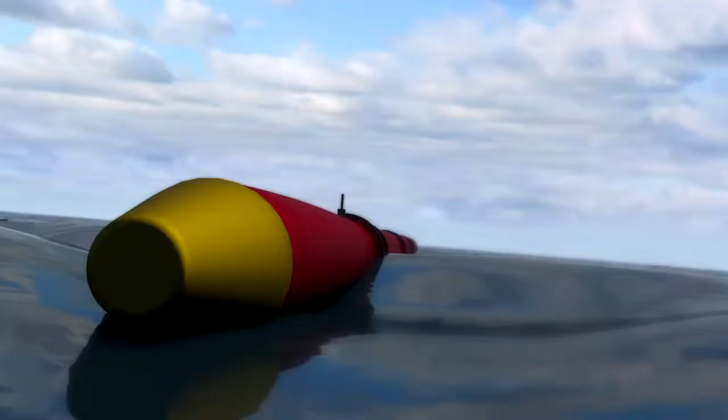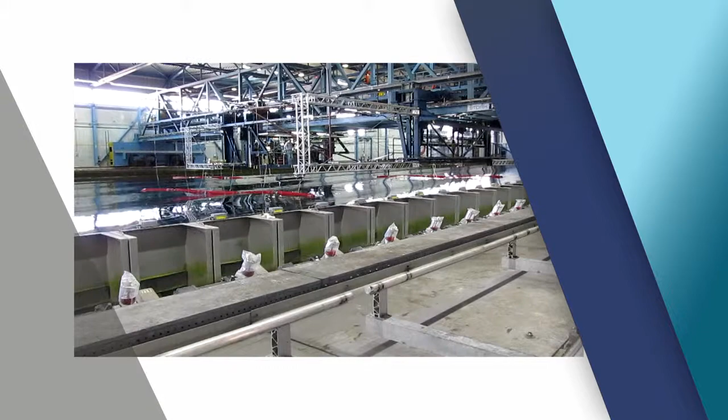The world has a significant wave energy resource, which, if properly exploited, could contribute significantly to global energy requirements. Deployment of wave energy converters, or WECs, in pre-commercial arrays is starting to occur now, with many more planned for the coming years. However, there is a need to understand the issues involved and be able to quantify any potential impacts of WECs when operating in arrays.

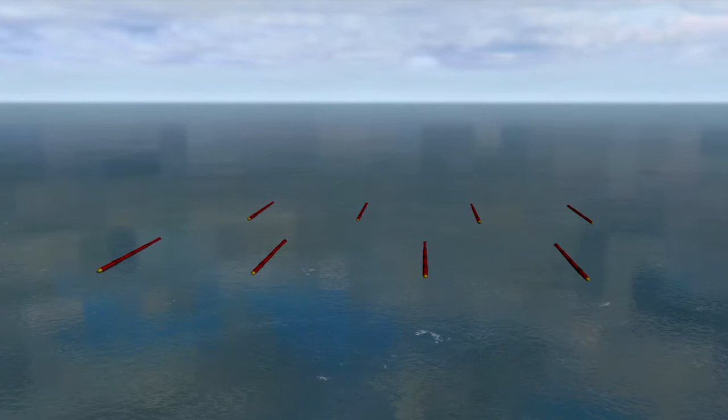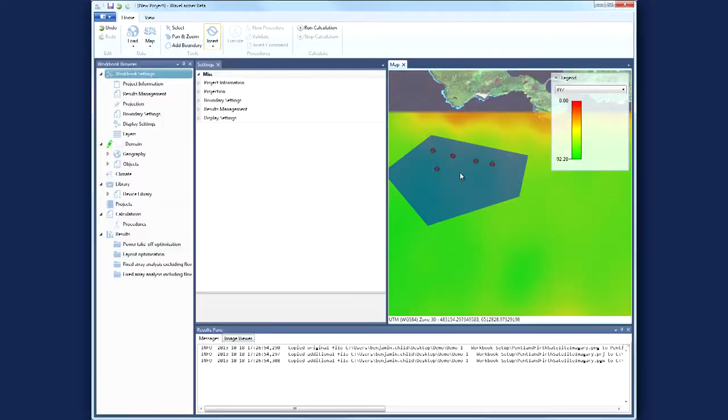As arrays grow in size, there will be a requirement to carefully consider the planning and analysis of WEC arrays. This is where DNV-GL's WaveFarmer software can help. WaveFarmer is a single software tool that allows information from multiple sources to be loaded, simulated and explored. It can accurately calculate the annual energy yield, reducing uncertainty in the cost of energy calculations for technology and project developers, investors and other key stakeholders.

Andrew Garrad has had over 30 years' experience in the renewable energy field. WaveFarmer is a virtual wave farm. So you can imagine a wave farm in real life, devices being put into the sea, and what we're trying to do is to develop a tool which can predict exactly how all those devices will behave, both individually and collectively as a farm.

R.V. Ahilan, Director of Division at DNV-GL Energy Renewables Advisory, has been pivotal in the consultancy of the PerAWaT project. Once you put multiple devices, waves are reflected, diffracted from the single unit, and that can then affect the other units that are on location.

So one of the key developments that we've made in WaveFarmer as part of the PerAWaT project is the fact that we are able to calculate rigorously the interference effects between multiple devices, which is an absolutely essential part of being able to identify the energy production capability of a farm as opposed to a single device.

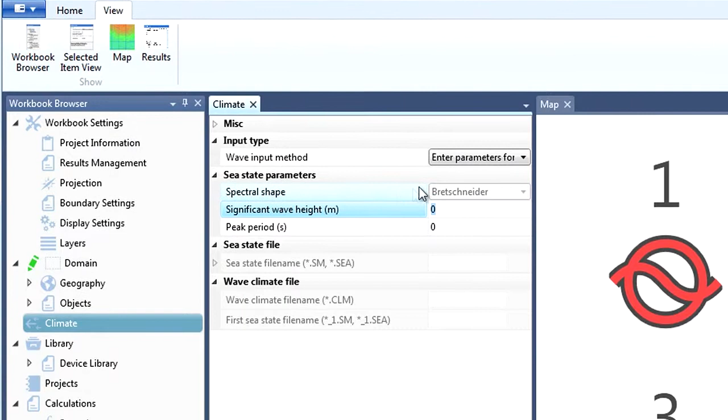Inputs like seabed elevation, WEC locations, wave inputs, site constraints, and WEC description can be loaded in a wide range of commonly used formats and coordinate systems. WaveFarmer can be used with any type of WEC, including attenuators, pitching flaps, and point absorbers.

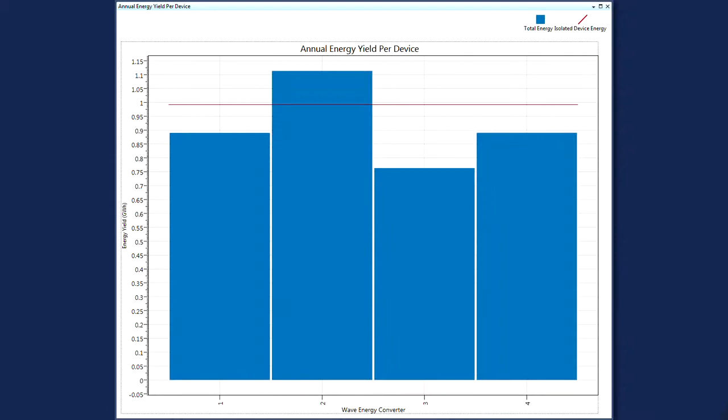There is a link to the single WEC design tool, WaveDyn, as well as DNV-GL's wave climate analysis and processing tools. WaveDyn has been commercially available through DNV-GL since 2012 and was the first public outcome of the PerAWaT project. Energy yield results are broken down graphically by device and sea state to allow in-depth analysis.

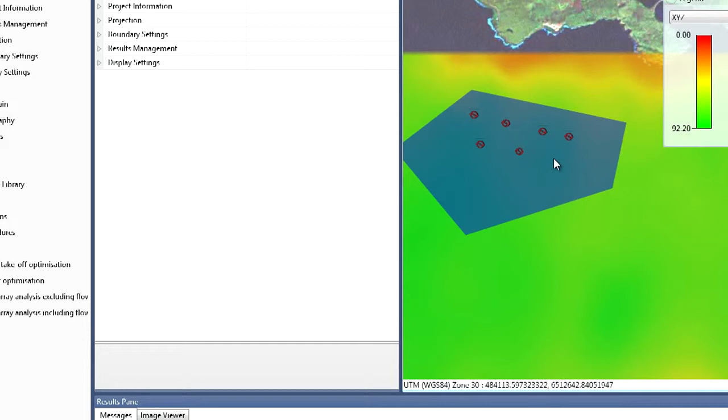The genetic algorithm optimization computes the best layout of WECs for you, maximizing yield subject to realistic constraints such as minimum spacing and inclusion or exclusion zones. Maps show geographical information transformed to a single coordinate system and overlaid with results such as modifications to the wave climate from the array. Further extensions and modules are being created as part of DNV-GL's ongoing development program.

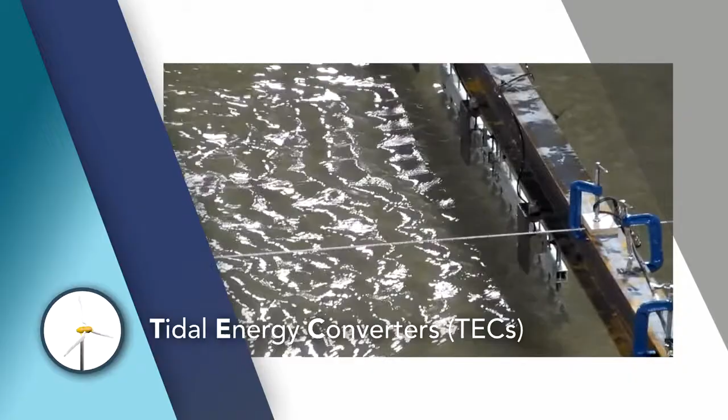Tidal motion is predictable, offering both a renewable and dependable source of energy. Tidal is a thriving industry that could grow rapidly with investment over the coming decades. The tidal industry is at a point where demonstration farms are being planned.

These farms mark the dawn of a new era of marine energy, and the industry now requires tools and standardized methods to help project developers and energy analysts plan arrays which will provide greater confidence to lenders and investors. As arrays grow, there will be a requirement to provide tools and methods that can model their interactions. This is where DNV-GL's TidalFarmer software can help.

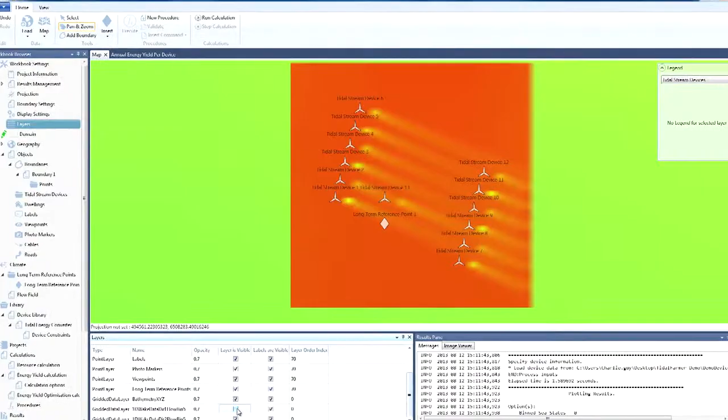What is TidalFarmer? TidalFarmer is a software tool that allows a user to define inputs to plan and build an array of tidal stream turbines. It models the array interactions within the environment and can predict the potential energy yield, allowing users to quantify uncertainty and make informed investment in the tidal stream industry. But why do we need tools like TidalFarmer?

TidalFarmer works by setting up, first of all, a model of the individual device. So we have a device, one tidal turbine, and we understand how that works. And we put that in a tidal stream, so the water passes by the tidal turbine. But of course, if this is going to be something which is commercially attractive and is going to make a large-scale contribution to our energy mix, which I believe it will, then we're not really just interested in how a single tidal turbine works.

If water flows past a tidal turbine, it comes to the turbine with kinetic energy, with energy by virtue of its motion. Energy is then extracted by the turbine, and the water has therefore to go slower when it's gone past. If you try to slow it down too much, then actually it looks like a blockage in the river or in the stream, whatever it is. And the water will just say, actually, I'm not going to come here anymore, I'm going to go somewhere else.

So you have to be very careful that you don't try and extract too much energy so that the water says, yeah, I can find an easier route some other way. And that's the point of TidalFarmer. What TidalFarmer does is that we are able to model the collection of turbines and figure out how to optimize their locations.

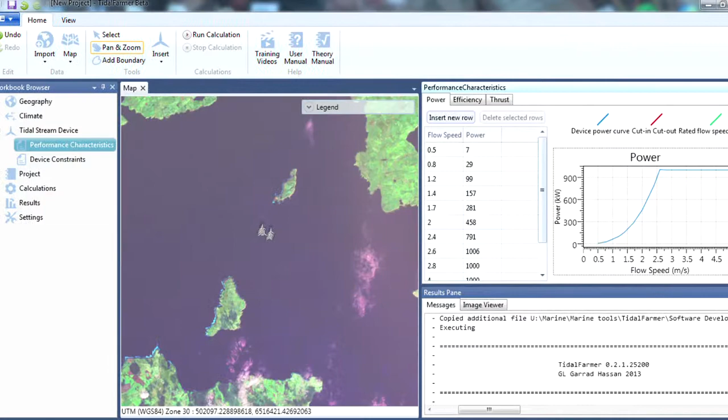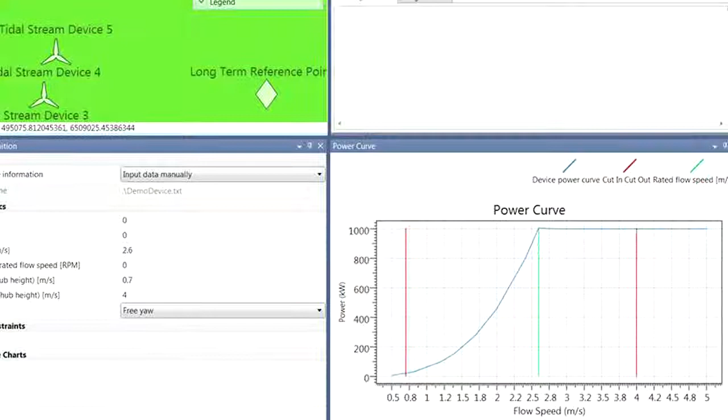TidalFarmer has many features that help to accurately predict the performance of device arrays. This includes a recently developed three-dimensional wake model that allows a full realization of a wake downstream of devices. Information concerning tidal stream turbines within a project can be modified, such as the power curve, rotor diameter, and yaw strategy, to help evaluate turbine design concepts.

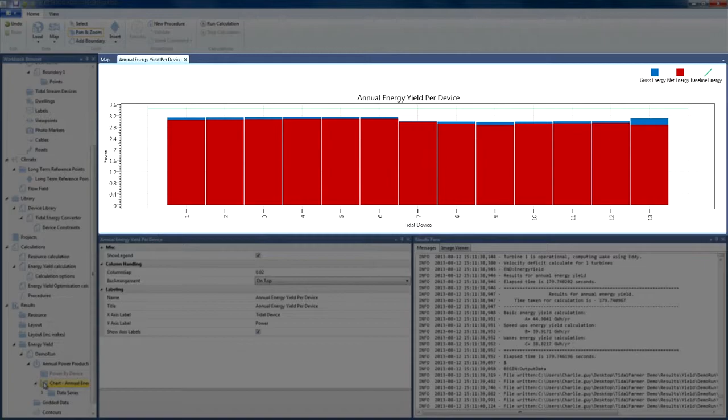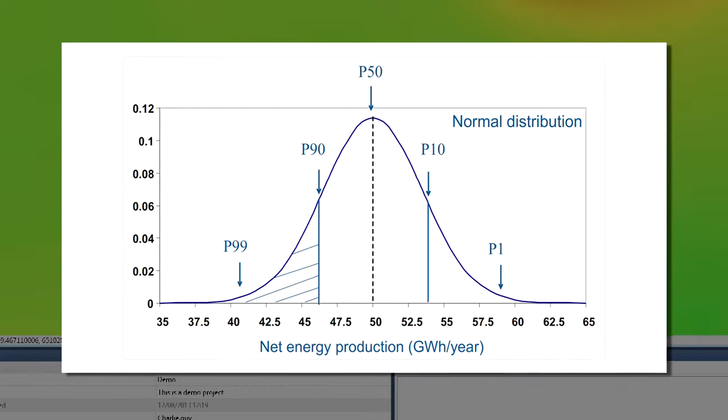Turbine wakes can be visualized, enabling regions of high velocity deficit to be identified. Graphing tools allow users to view the energy production per device, so that any issues can be identified and corrected. Fast engineering models enable quick design iterations and allow you to quantify the level of uncertainty in a tidal farm project. Maps showing geographical information allow for results to be overlaid, enabling users to explore the impact of an array.

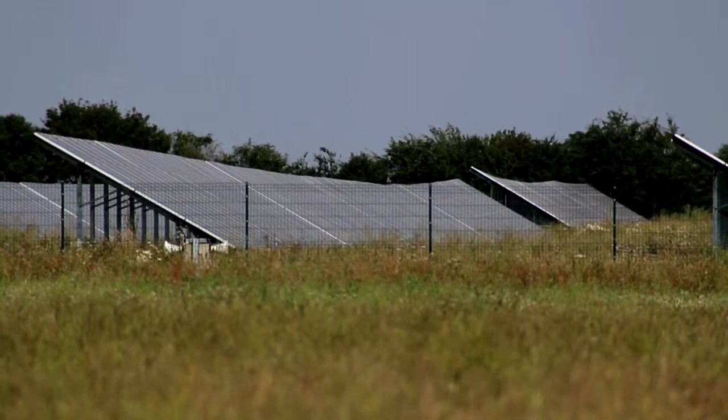As energy demand rises and the problems associated with conventional generation become ever more apparent, we need to address the serious challenges facing our energy supply. So what does the future hold for the renewable marine energy industry? We're at a turning point in our consideration of energy in general and renewables in particular. I think we're seeing all over the world now a reconsideration of the future energy policies, future energy investments.

It's always been man's desire to actually create or use energy that can be replenished as fast as they can use it. And this is where the renewable energy technologies beat everything else. That means taking advantage of every form of renewable energy technologies, and we have demonstrated in the last 2 to 3 decades how well the wind energy that we have on Earth can be mobilized for purposes of man.

So if we're looking at the future, we can look at a future relying on fuels coming from unreliable places in Eastern Europe, in the Middle East, whose prices are increasing, or we can rely on our indigenous product, wind, German wind, Swedish wind, Moroccan wind, British wind. When it's on your land, it's your wind. Same thing with waves, same thing with tides. So they're your tides, they're your waves, they're your wind when they're in your country.